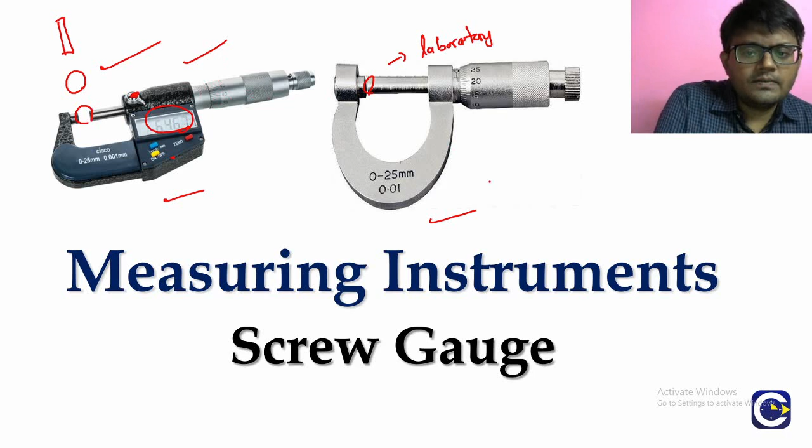And the moment you hold it and lock this nut, what you see here is that a reading will appear. So we don't need to do anything else - that is the benefit of the digital screw gauge. Some laboratories will have the digital screw gauge, which eases up the entire job, but conventionally we will talk about the normal laboratory screw gauge.

So when we want to understand the screw gauge, first let us know what is its purpose. Generally when we want to measure lengths or distances, we use the meter scale. The least count of the meter scale will be 0.1 centimeter or 1 millimeter, the smallest division on that meter scale.

But if we want to measure lengths with even more accuracy, like with vernier calipers, we discussed in that video that we can measure lengths accurately up to 0.01 centimeter. So the least count of most common vernier calipers is 0.01 centimeter. But if you want to take measurements with even more accuracy, then we'll use the screw gauge. Typically with a screw gauge we can measure up to 0.001 centimeter accuracy - so we'll have a higher accuracy than the vernier calipers.

But vernier calipers has its own advantages, because it has different positions where we can take the measurement. Vernier calipers can be used to find the depth of a vessel, but screw gauge cannot be used to do that. So the applications of the screw gauge will be limited, because there is only one position where we can hold the object, between these two rods.

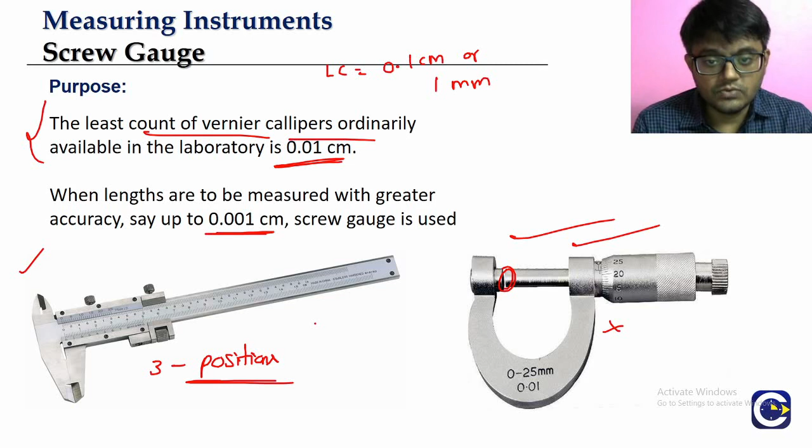We will try to study the screw gauge in this video, and basically what we'll try to understand is how the screw gauge is designed, what are its different parts. Then we'll see what are the things we need to know before we take the measurement - we should know some things about the screw gauge's working. So we'll talk about the working of the screw gauge, then we'll talk about the measurement.

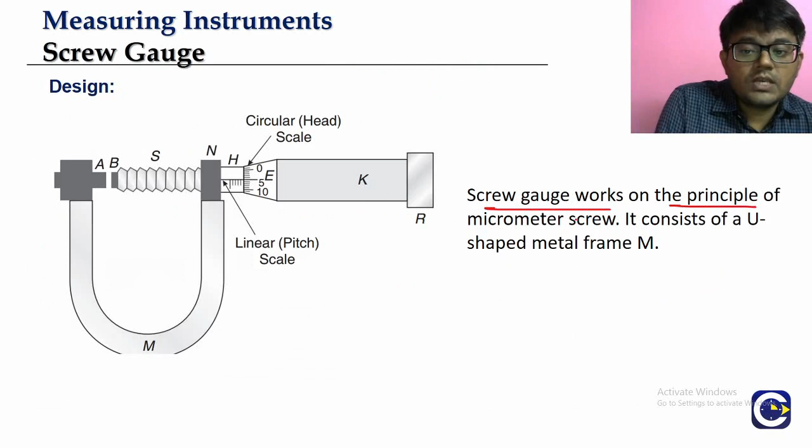So first we'll start with the design of the screw gauge. Now if you look at the screw gauge, it works on the principle of the micrometer screw. What is a micrometer screw? We'll talk about it. Basically, what is a screw? A screw is something that we will be able to rotate, and then it will have a linear movement.

So when you rotate a screw, what is going to happen? The screw will have a linear movement. So it is going to work on that principle. When you rotate, the screw would be having a linear movement, and that is the basic principle of the screw gauge.

Why the word micrometer has come, we will be able to know once we complete the discussion. Okay, so what will be the main parts of the screw gauge?

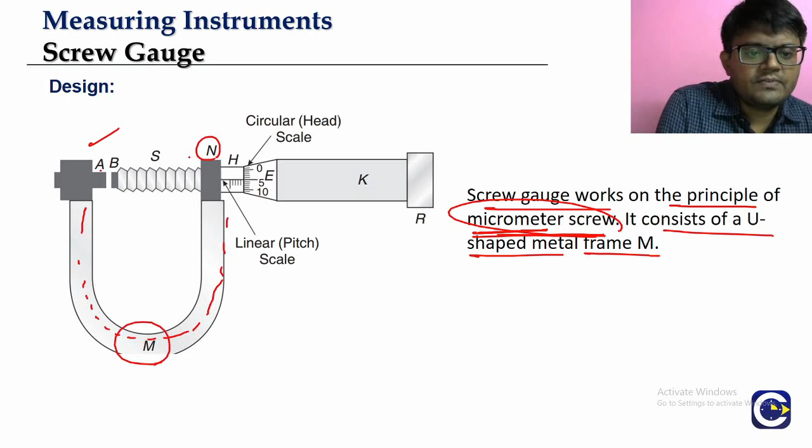We will have a U-shaped metal frame. You can see here, this is a U-shaped metal frame, which we are denoting with M. You can see on one end of the metal frame we have the fixed end A, other side we have the fixed end N. So what are the two things we have? One side of the U-shaped frame is A, other side is N.

Now at one end of it we'll have a small metal piece A. What do we call it as? We'll be calling it as the stud. So this metal piece A will be called as stud. It can be also called as the anvil. But here we don't need to discuss about those names and all that, just having some idea will be sufficient. And we see it will have a plane surface, you can see here there is a plane face it is having.

The other end N of the U-shaped metal frame M carries a cylindrical hub H. The other end N is carrying a cylindrical hub. The hub H is cylindrical, and on this hub you will see that there will be markings.

So there will be graduations or markings. This hub H is graduated in terms of millimeter or half the millimeter. So this is basically the smallest division or least count of this particular scale. This is actually a scale, you know what we call it as? We'll be calling it as the linear scale or the pitch scale. So the cylindrical hub has markings, and that itself is representing a scale, called the linear scale or the pitch scale.

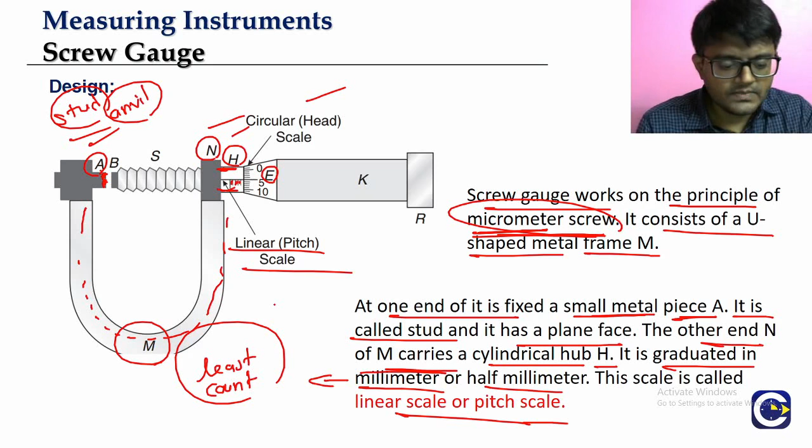So let us see how it is going to happen. Now the design: a nut is threaded through the hub and the frame N. So the hub and frame N, right? You will have a nut that will be actually threaded through the frame N and the cylindrical hub.

Okay, so these two will be fixed, we have to keep that in mind. The frame N or that cylindrical hub, they will not be moving, these two will be fixed. But through them there will be a nut that will be threaded, and this nut will be able to move the screw S. The nut that is connected to the screw S on one side, other side it will be connected to the right side part - we'll talk about that later - but when we move the nut, obviously the screw will be moving.

So when the screw is moving, what is going to happen? The plane face of the screw B will also start moving.

You can see the plane face of the screw B is kept opposite to the plane face of the frame A. These two, the screw can either move this way or that way. When it is coming and completely the plane faces of A and B are touching...

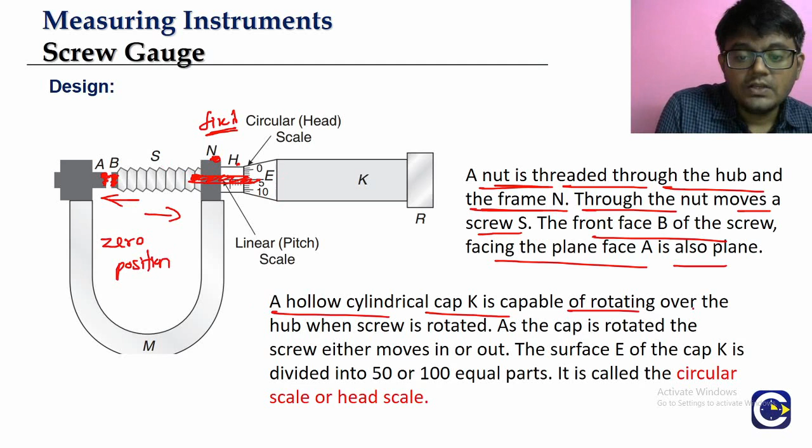We will see what is there on the right side part. You will have a hollow cylindrical cap K, which is capable of rotating over the hub.

So K is a hollow cylindrical cap, like a cap. This will be capable of rotating over the hub. As I said, the hub is fixed.

The hub will not move. You will have the hub like this, and this cap will be able to rotate over the hub. I'll show you the visualization so we can understand that better.

When the cap is rotated, the nut is connected to that, so the nut will be rotated, and the screw also will be rotated. As we rotate the cap, the screw will either have inward movement or outward movement.

This means the screw will have a linear movement. As the screw is rotated, it will also have a linear movement, either moving inwards or outwards.

And the surface E of the cap K, there will be this curved surface. What do we call it? We call it E. This curved surface will be divided into markings.

Usually it will be divided into markings of 50 or 100.

And this scale that is formed on the part E will be called the circular scale or the head scale. What do we call this part? The circular scale or the head scale.

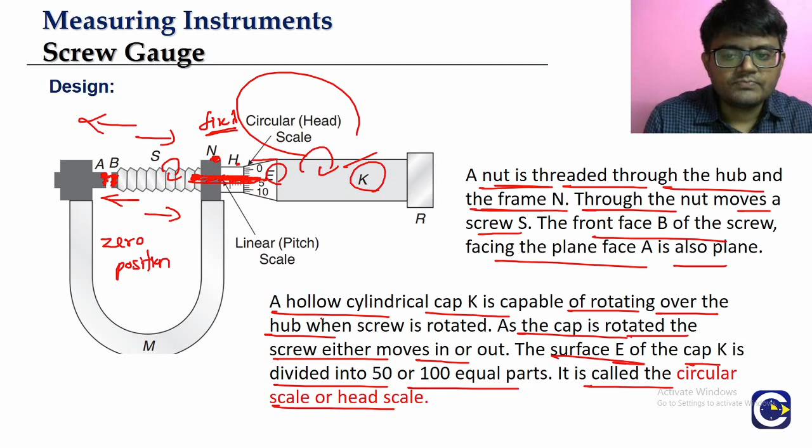So this is the cap K. This is A, and B you can see, and this is the screw.

This is the hub H. H is not moving, you can see. This is N, also not moving. What is moving? When you rotate the cap, what is happening?

This is the part E, where you have the circular scale. When you rotate the cap, what is happening?

The nut, through the nut, the screw is able to rotate. The screw will either move inwards or outwards, and this is typically the way we will bring it.

Once it is touching, we'll fix this bolt, and we can take the measurement. We'll talk about how we take the measurement, but this is how the screw gauge is basically designed.

Now what we will do is try to understand what are the things we need to know about the screw gauge before we go and take the measurements. But here one thing...

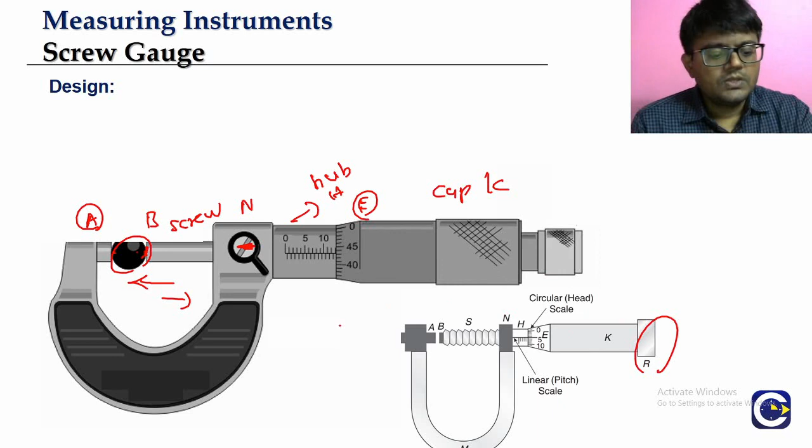Through the working, we will be able to understand those important things that we need to know before we go and see how we take the measurements.

So what happens, as we said, when the screw is rotated, in addition to the circular motion, the screw is also having linear motion. You can see the screw is either linearly moving inwards or outwards. The screw head, B here, is either moving forward or backward along the axis of the screw.

And when we complete one full rotation of the screw, the cap and the circular scale also complete one full rotation. So when we complete one complete rotation of the cap, the circular scale also will have one complete rotation, and the screw also will have one complete rotation.

Then whatever the linear distance moved by the screw during one complete rotation, that is what we call the pitch. So what is the pitch of the screw?

It is the linear distance moved by the screw when it has one complete rotation. How do we measure that value? For that we cannot have one more scale here to measure it. We are going to get it from the pitch scale markings.

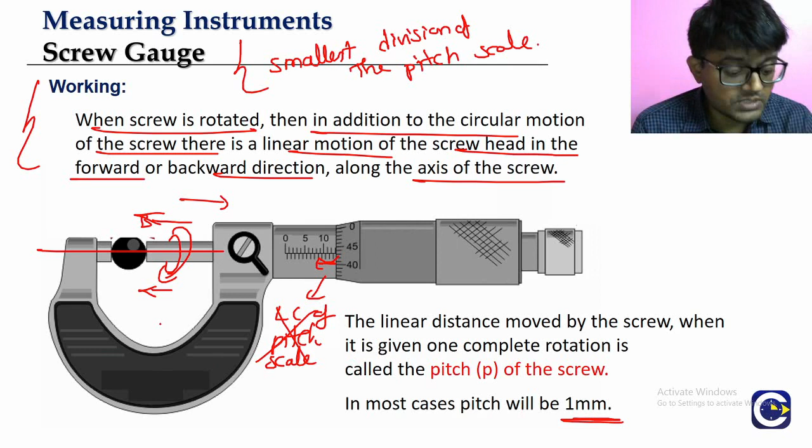Now using the pitch, we are going to talk about the most important thing for measurements, whether it is the vernier calipers or the screw gauge: the least count of the devices. The least count will be depending upon the pitch.

So look at this. If we have the circular scale, E, rotated through one circular scale division, using this reference line, just think about rotating it by getting just one division. So the circular scale is rotated through just one circular scale division.

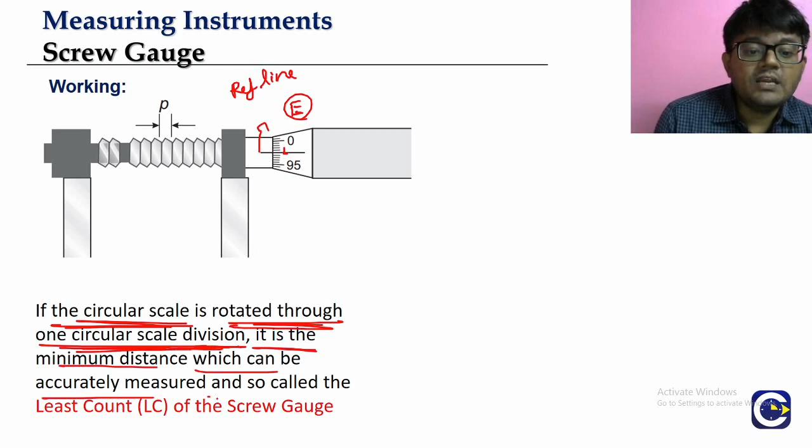Then that is basically the minimum distance which can be accurately measured by using the screw gauge. What is the minimum distance that can be measured accurately by using the screw gauge? Think about it: you just rotate that circular scale by one division. The circular scale will typically have either 50 divisions or 100 divisions.

So usually the circular scale will have either 50 divisions or 100 divisions. Just think about moving that circular scale by one division, and that value is basically the smallest length which we can measure with accuracy by using the screw gauge. So this is what we call the least count of the screw gauge.

How are we going to get it? Remember, if we rotate the circular scale by one full rotation, for example, we will take the circular scale having 100 divisions.

Imagine we take the circular scale having 100 divisions. If one full rotation means we are covering 100 divisions, what is the distance covered on the linear scale or pitch scale? It is the pitch value, which we said will usually equal 1 millimeter. So for 100 divisions of the circular scale, the distance moved is the pitch.

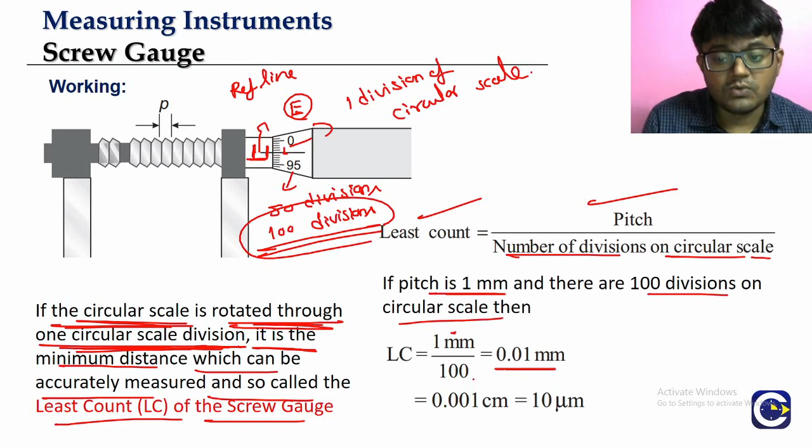Now with the example we are talking about, let us say the pitch is 1 millimeter and there are 100 divisions on the circular scale. Then what will be the least count? 1 millimeter is the pitch, divided by 100, that will be equal to 0.01 mm or 0.001 centimeter.

Remember in the initial discussion we said up to what accuracy we can get the lengths by using screw gauge. We said 0.001 centimeter, you can see here. And if you try to express it in terms of micrometer, centimeter means 10 power minus 2 meter. Totally this is 10 power minus 5 meter, or we can say 10 micrometer.

Mu is the symbol for micro. So the least count of the screw gauge is in the range of micrometer. That is the reason why we call it the micrometer screw. Remember we said the screw gauge works on the principle of the micrometer screw. Why are we bringing in the word micrometer? Because the least count that we can get from the screw gauge will be in the range of micrometers.

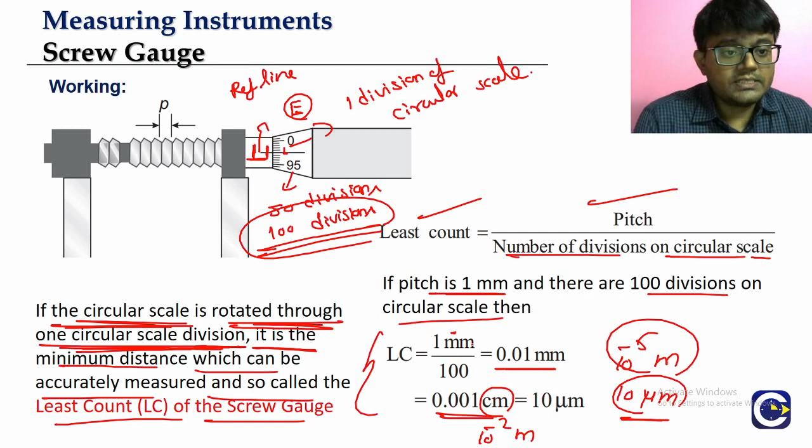Okay, so we understood the concept of pitch and the least count. Now we will look at the measurement position, because in screw gauge we don't have multiple positions. Like you can see this person in a laboratory taking some readings. Let us not bother about those readings, let us only focus on the measurement position. You can see where he is keeping it, this is the flat surface A and this is the flat surface B. He is basically keeping the object, this spherical object, between the two flat surfaces, and here the nut is fixed.

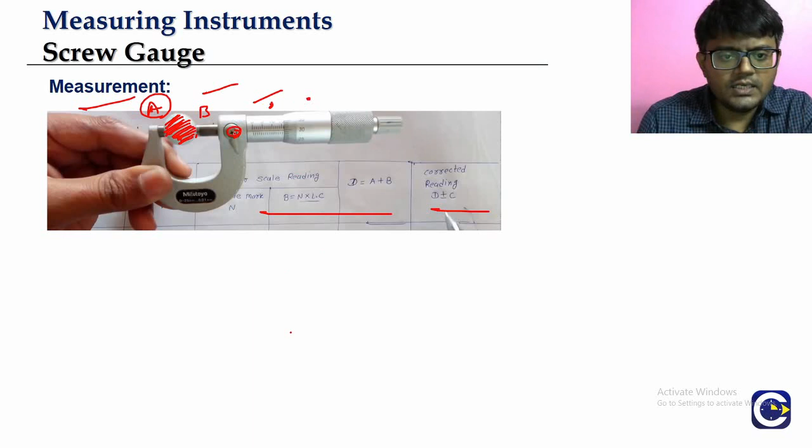Once you make sure that surface A and surface B are touching the sphere, you are basically fixing the nut. Now the position is ready to take the measurements. We will be shifting our focus onto the pitch scale and the circular scale, because once you fix it, we will just have to look at the main scale, or not, we don't call it a main scale, we call it the pitch scale or the linear scale.

And the other scale is the circular scale or the head scale. What is the other one? Circular scale or the head scale.

So we have to look at what is the reading on the linear scale. Linear scale can also be called the pitch scale. I am emphasizing on both these words because sometimes in examination questions they might use the word circular scale or the word head scale. And some people think head scale means maybe it is like a main scale, so they try to confuse this with the linear scale.

We should not confuse, we have to be clear. That main scale word will usually not come in. Main scale word we will not use. What are we going to use?

We will use the linear scale or the pitch scale, that is the hub, cylindrical hub. Then we have the circular scale or the head scale. These names we have to be very much comfortable with.

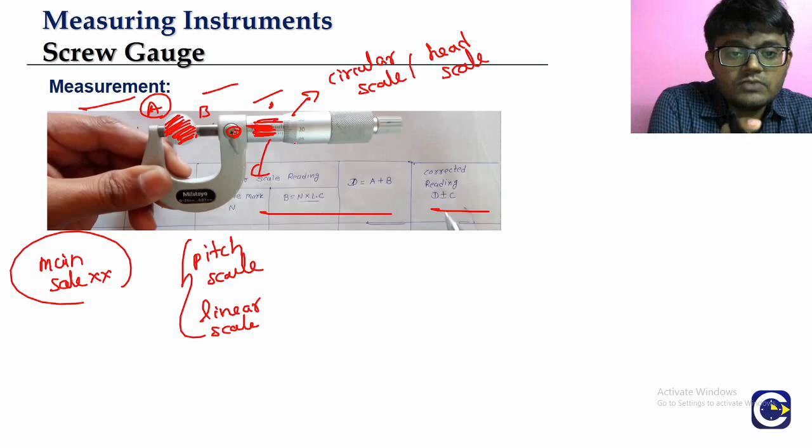Now this is the position which we have to hold that object before we go for the measurements. Now we'll go for the measurement. How are we going to get the measurement?

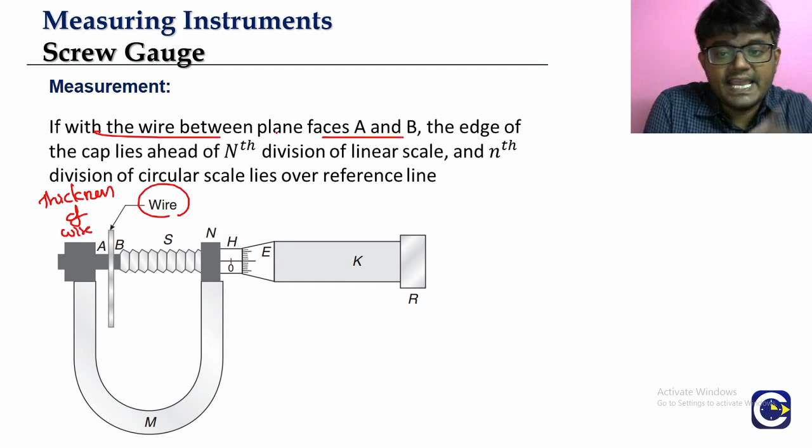Look at this: the edge of the cap lies ahead of the nth division of the linear scale. This is the cap, and this is the edge of the cap. The edge of the cap is lying ahead of the nth division of linear scale. Meaning, the linear scale has divisions. Let us say there is division 10. After that, the edge of the cap is starting. We have to focus on this 10 - this is our capital N.

So I can also say it another way: what is the linear scale marking which you can clearly see on the left side of the edge? The edge is there, right? On the left side of the edge, you will have the marking of that linear scale. That is what will be the reading that is coming from the linear scale. Generally we will represent this by capital N.

And then the small nth division of the circular scale lies over the reference line. As I said, there is a reference line - this is the reference line. Circular scale has the markings. We'll have to look at what is the circular scale marking which is either in line with the reference line, exactly matching, or a little bit ahead. Maybe it is the 44th division on the circular scale, imagine, that is aligning with the reference line. Then we will take that small n value as 44.

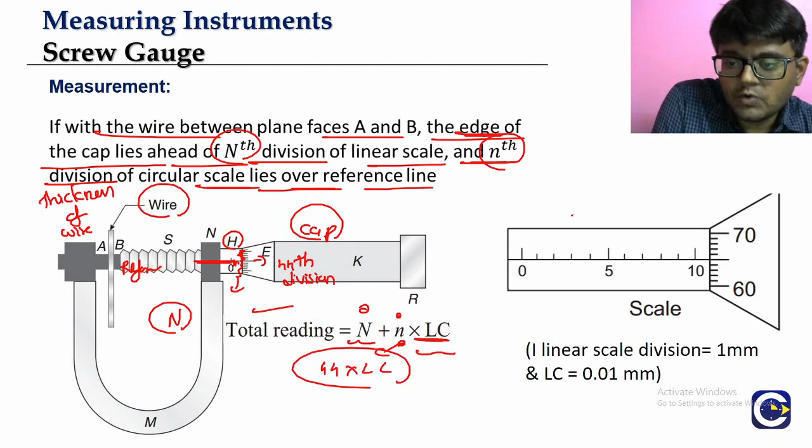So just take this - this is our linear scale. And here they are giving us: one linear scale division is equal to 1 millimeter. What is one linear scale division? 1 millimeter. Now remember what we said - we have to check the edge. This is the edge, this is the edge.

Edge is lying ahead of which division? In the linear scale, we have the 10th division here. Clearly you can see the 10th division, but the 11th division you are not able to see. Look at it carefully. On the left side of that edge, what can you see? The 10th division you can see, but are you able to see the 11th division? No. That means we have to take the 10th division on the linear scale as the linear scale division.

What is the value of each linear scale division? 1 millimeter. So what is the linear scale reading? It will be 10 into 1 millimeter, because the value of each division on the linear scale is 1 millimeter. So it is 10 millimeters. That is the reading from the linear scale.

Now let us talk about the reading from the circular scale. The nth division of the circular scale which is lying over the reference - it is either perfectly in line with the reference or a little bit ahead of it. Look at this: 60, 61, 62, 63, then 65. The 65th division of the circular scale is in line with the reference, the 65th marking on the circular scale is in line with the reference.

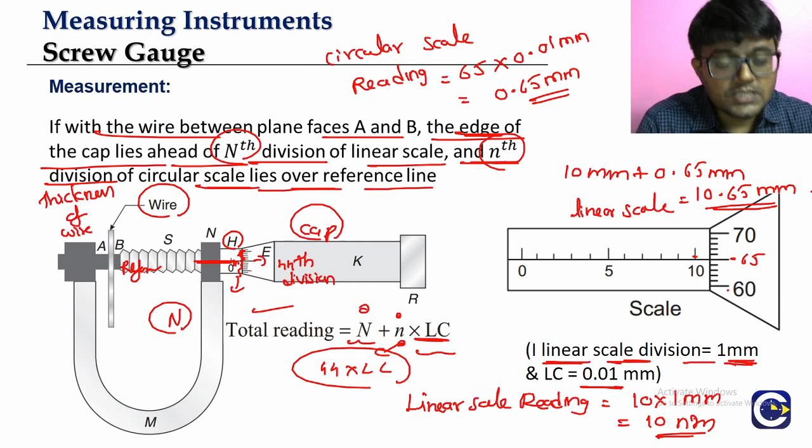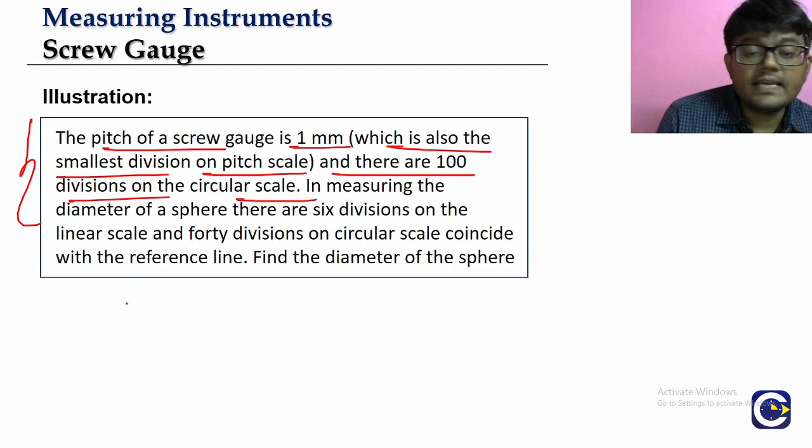Remember, what is the least count formula? Pitch divided by the number of divisions on the circular scale, correct? Pitch is 1 mm divided by the number of divisions on circular scale, which is 100. What is it going to be? 0.01 mm. So we'll keep it as 0.01 mm. This is our least count.

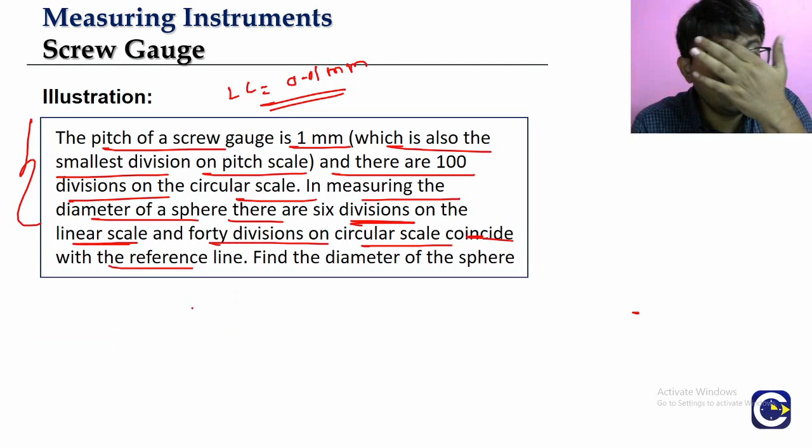In measuring the diameter of a sphere, I showed you the position which we will use to take the measurements. We can use a screw gauge to find what is the diameter of an object like a sphere. In measuring the diameter of a sphere, there are 6 divisions on the linear scale - what is the number of divisions on the linear scale? They are actually giving us the reading on the linear scale: 6 divisions, and 40 divisions on the circular scale coinciding with the reference line. So what is the reading on the linear scale or pitch scale? How many divisions are there? 6 divisions. 6 into what is the reading on the linear scale or pitch scale? The smallest division is what?

1 millimeter, right? Means what? 6 into 1 millimeter, what is it? So how much is it going to be? It will be 6 millimeters. That is the reading coming from the linear scale or the pitch scale.

Linear scale can be also called as the pitch scale. Then what about the reading on the circular scale? How many divisions are they saying? 40 divisions on the circular scale coincide with the reference line. Means what? Small n into least count, that is the reading from the circular scale. Here small n will be 40. 40 into what is the least count? 0.01 mm. 40 into 0.01 means it will be 0.4.

How much is it? 0.4 mm.

So now we have the reading from the linear scale, and we have the reading from the circular scale. What is the total reading? It will be 6 mm, which is the reading from the linear scale or the pitch scale, plus 0.4 mm. What is it? 6.4 mm. So this is how we will be able to get the reading from the screw gauge.

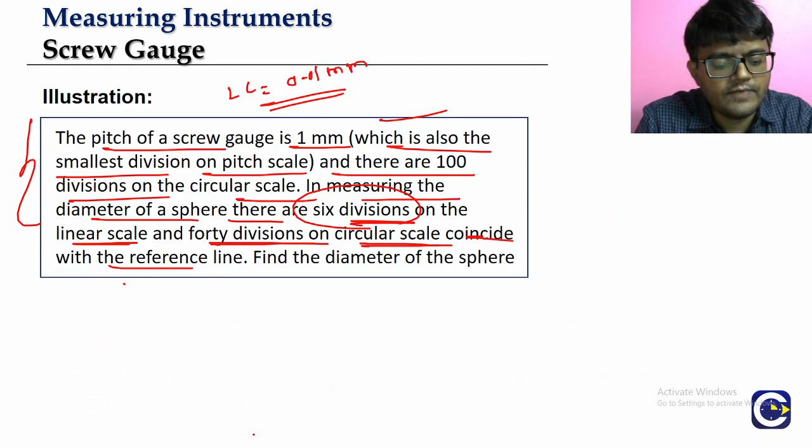So first we are getting the least count, then we are just going for the measurement calculation. So measurement calculation will be coming from where? It will be coming from the linear scale reading and the circular scale reading. We can see here least count is what? The pitch is 1 millimeter. 1 millimeter divided by 100, what is it? 0.01 millimeter.

Then what is the linear scale reading? It is 6 divisions, right? Which means what? 6 into 1 millimeter, because the smallest division is the pitch, which is equal to 1 mm. So 6 divisions are there on the linear scale. Means the reading will be 6 into 1 millimeter, which is 6 millimeter.

Okay, now look at the circular scale reading. Which division is coinciding with the reference line? 40th division. So 40 into least count, that is 0.4 mm. So what is the total reading? Which is the linear scale reading 6 plus the circular scale reading 0.4, which will be totally 6.4 mm.

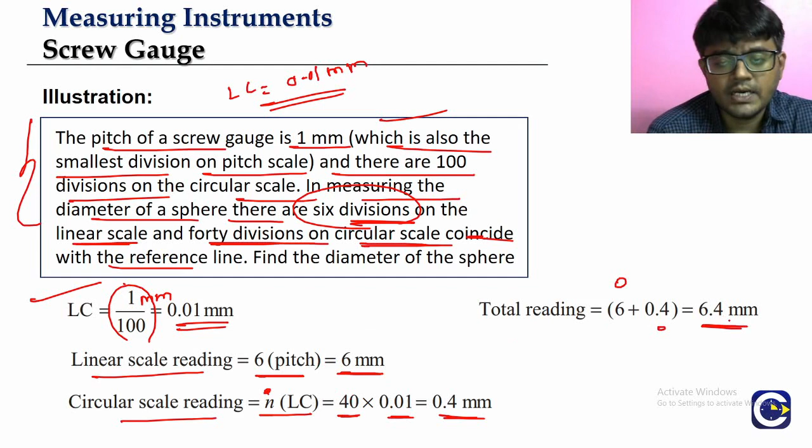So this is how we'll have questions mostly on the screw gauge when it is about finding the measurement. Either we'll have questions asked on getting the least count value, or we'll have questions.

Now, like we have seen in the case of vernier calipers, we could have some zero errors in the case of the screw gauge also. So what is this zero error? For these measuring instruments, we'll talk about the zero position. So what is zero position? Already we have mentioned about it. You have these flat faces A and B which are just touching each other.

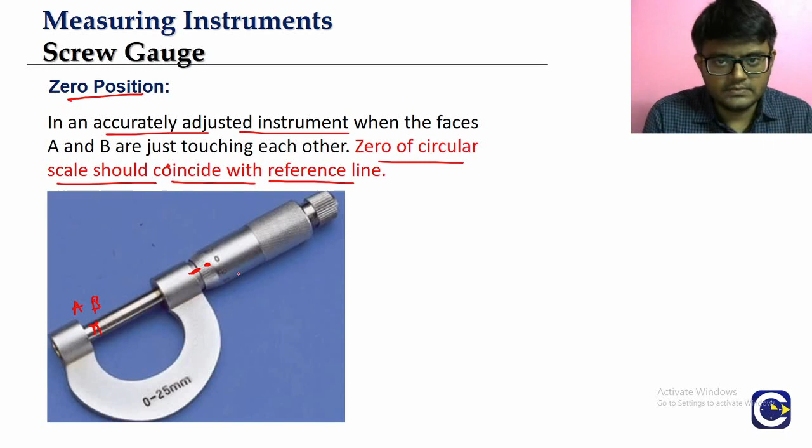So in this case, what do we say? We will say there is no zero error. Now when will the zero error come? If the zero mark of the circular scale does not coincide with the reference line. You can see here, so this is the reference line. See, division 5 is coinciding. Zero of the circular scale is not coinciding.

See here, this is the reference line. Which division is coinciding? Division 95 is coinciding. Means in this case, the zero of that circular scale is ahead of the reference. Here zero is ahead - the zero of the circular scale is ahead. Here the zero of the circular scale is behind. Accordingly, we are going to talk about two types of zero errors. But here we will just understand the concept of the zero error. So what is it?

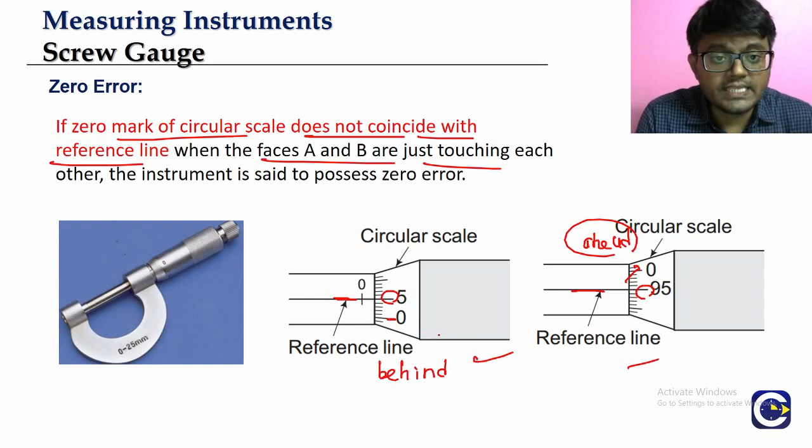When we bring these faces A and B just touching each other, you see that the circular scale's zero is not coinciding with the reference line. We can have two scenarios here, and both of them indicate a zero error. Now we have to understand the difference between them.

One type of zero error we call negative zero error. What is this negative zero error? If you see, the zero of the circular scale is advancing ahead of the reference line.

The marking 95 is coinciding with the reference line. When we say marking 95, that side means we take positive, and this side means negative. So if you see 5, 10, 15, the other side is positive, but you are coming in the reverse direction, so we take it as negative. So how many divisions is it behind? 95 means we are behind 5 divisions.

So when the zero of the circular scale is ahead, the reading on the circular scale is negative, because it is in the reverse direction. Here, the 95th division of the circular scale is coinciding with the reference line. That means we have a 5 division mark in the opposite direction. So there are 5 divisions between the zero mark and the reference, but in the opposite direction. That is why we take it as negative reading.

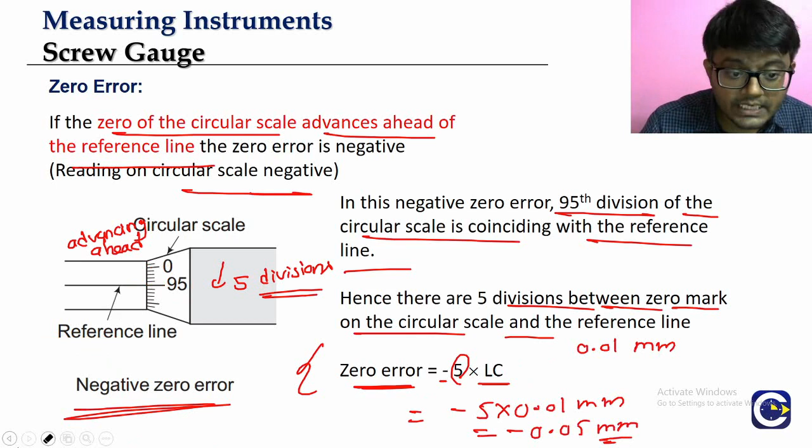One more thing to keep in mind about the zero error in the negative sense: when there is a negative zero error, we will not be able to see the 0 marking on the pitch scale. This is because the circular scale is shifted slightly to one side, so we cannot see the 0 of the pitch scale or linear scale.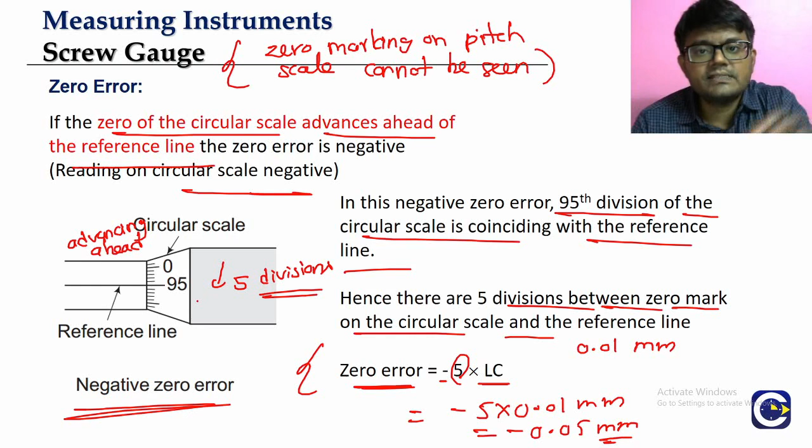So whenever they say that the 0 of the pitch scale is covered or not visible, that is a hint indicating negative zero error. Now let us see the other side: positive zero error. Here, the 0 of the circular scale is behind the reference line, as you can see.

But you see what marking on the circular scale is coinciding with the reference line.

Marking 5. What is the reading on the circular scale? 5, right? So the reading on the circular scale will be positive. Negative error means circular scale reading will be negative. Positive means circular scale reading will be positive. That is how simple we can remember.

Now see, in this case what is happening? The fifth division of the circular scale is coinciding with the reference line. But in the previous case and this case, what is the difference? There it was the fifth division in the reverse direction, that is why we took it as negative. Okay, so here the fifth division is in the forward direction, right?

So the 5 divisions are marked between the 0 and the reference line. So what is the 0 error we are going to take? It will be plus 5 into the least count. Same way, if the least count is, say for example 0.01 mm, then what will be the total 0 error? It will be plus 0.05 mm. Okay, so this is how we are going to get the 0 error.

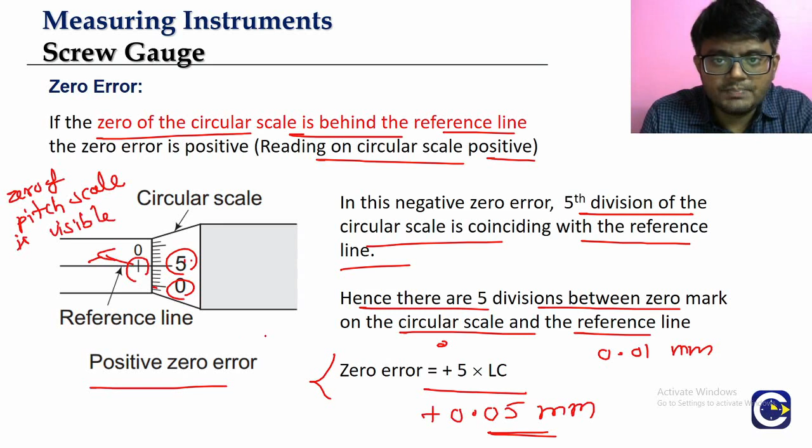And we can see one thing here: in case of positive 0 error, the 0 of the pitch scale is visible. In case of negative 0 error, the 0 of the pitch scale will not be visible. That is another difference between the negative 0 error and the positive 0 error.

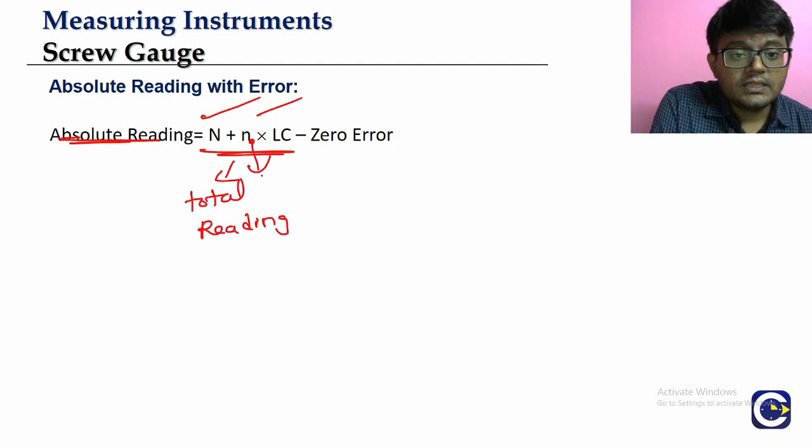Now what about the absolute reading or actual reading we are going to count? The absolute reading will be the total reading. This is the total reading, right? What is the total reading value? The pitch scale reading plus circular scale reading. Circular scale reading is the number of divisions on the circular scale which is coinciding with the reference line, into the least count.

Okay, so total reading, whatever we get, from that we have to subtract the 0 error. Always the 0 error will be subtracted. From whichever measurement we are having, we have to subtract the 0 error to get the absolute reading.

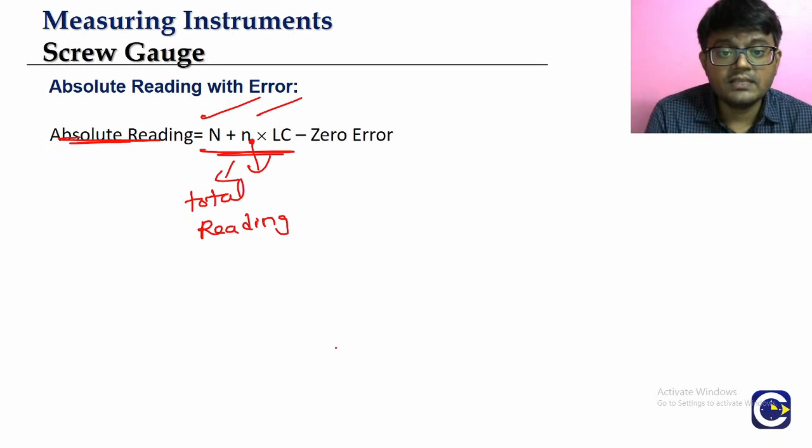This is something that we have seen even in the case of the vernier calipers discussion also. Why I am trying to correlate between the vernier calipers and screw gauge is, other than the method of taking the measurement, other things more or less will remain the same. Other than the method of measurement, remaining things will be almost similar. Now there will be one more term sometimes we will keep hearing.

The term is zero correction. Okay, so it is nothing different. Zero correction is basically something which will be equal to the 0 error in terms of magnitude, but opposite in terms of the sign. Say for example, I'm talking about zero error. So we have seen both the examples, right?

Negative zero error means this is where I'm keeping minus 0.05 mm. Now what is the corresponding zero correction? It will be having the same magnitude as the zero error, but opposite sign, means it will be plus 0.05, like that. Okay, if the zero error is plus 0.05 mm, then what about the zero correction?

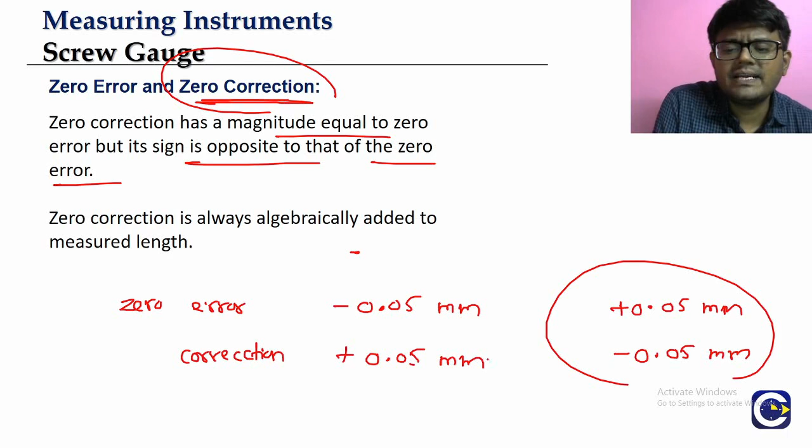I mean, how do we look at it? Just negative of the zero error, that's it. Now where do we use it in terms of the formula?

Look at this, what do we have? The absolute reading. What is the formula for the absolute reading? Absolute reading is equal to total reading minus zero error. But in place of this minus zero error, because what is the negative of zero error? Zero correction, right? We can also write it like this: total reading plus zero correction. How can we write it? Total reading plus zero correction, like that we can write.

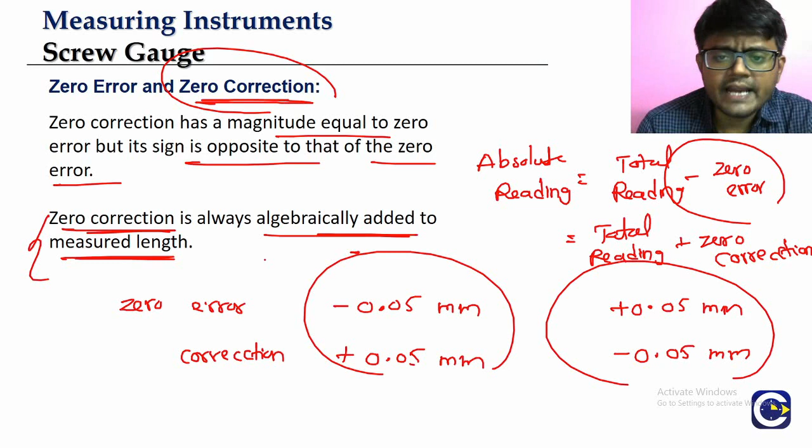Okay, so zero error is subtracted from the total reading. We have to subtract the zero error, but zero correction will be algebraically always added to the measured length. Measured length means total reading, right? So zero error means subtracted, zero correction means added, so that we will get the absolute value of the reading. Okay, so this is about how we understand the zero error in case of the screw gauge.

Now we'll look at a question. Look at this one: circular head of a screw gauge is divided into 200 divisions, and moves 1 millimeter ahead in one revolution.

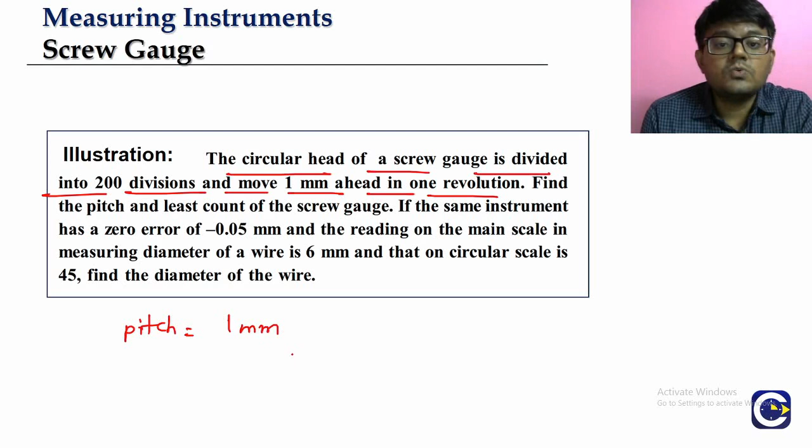Means it is moving 1 millimeter ahead. Look at this, guys. What is the pitch here? What is the distance moved in one full revolution? That is 1 millimeter. Okay, so we can find the least count.

What is the least count? Pitch divided by number of divisions on the circular scale. So 1 millimeter by 200. Okay, you know how much it is going to be? It will be 0.005 mm. Okay, so this is what is the least count.

Find the pitch and least count of the screw gauge. So we are able to get the pitch, we are able to find the least count also. Okay, if the same instrument has a zero error, so we'll just note it down.

What is the zero error given to us? Like that in most of the questions, they will themselves give the zero error. What is the zero error? Minus 0.05 mm. Is it a positive zero error or negative zero error? It is a negative zero error. How do we say? Because you look at the sign, it is negative.

And reading on the main scale in the measurement of diameter of wire is 6 mm. So I said generally we will not use the word main scale, but sometimes in questions like this, if they are using, then what is it that we need to understand? That they are referring to this as the pitch scale or the linear scale. So what is the reading on that?

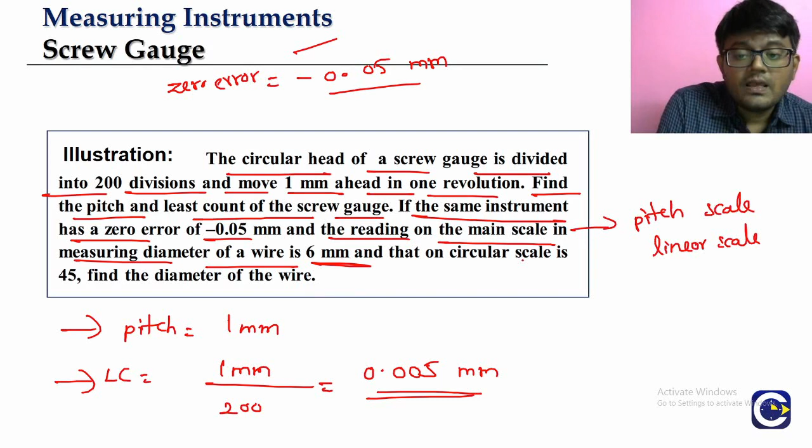It is 6 millimeter, and circular scale is 45. Means the 45th division of the circular scale is coinciding with the reference line. That is what they mean. Okay, so look at it.

What is the first? We'll get the total reading. They are asking us to find what is the diameter. First we'll have to get the total reading. Total reading means the linear scale reading, which is 6 mm, plus what is the division on the circular scale coinciding with the reference line? 45. So 45 into, remember, we have to multiply this with the least count.

0.005 mm. This is the total reading. Okay, so now we have to simplify this. If we simplify this, we will get the total reading. Okay, so we'll just do that simplification, and from the total reading already we got the pitch and least count. Those two parts of the question we already did. Now we are going to look at what is the diameter of the wire. We have to find what is the diameter of the wire.

Okay, so look at this. So we are looking at the total reading part. What is total reading part? 6 mm plus 45 into 0.005. So we can write as 45 into 5 by 1000. Just at the time of simplification, 5 5s are 25, 5 4s are 20. Okay, so totally which is 225 by 1000, means 0.225.

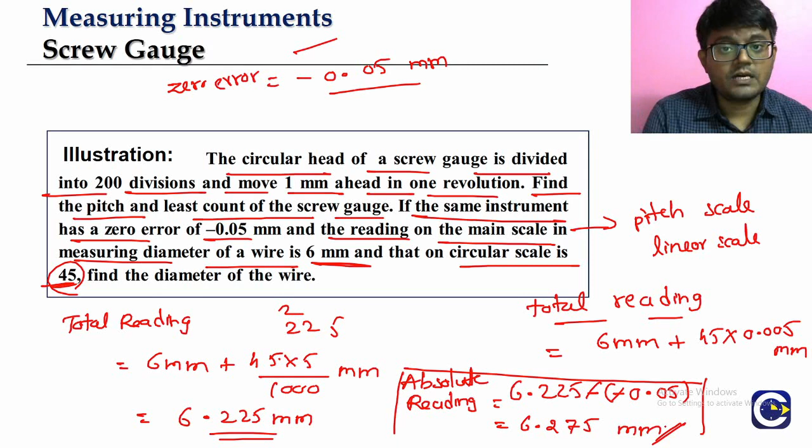Sometimes what happens is when we are using the screw gauge repeatedly, like even in your school laboratory, most of the screw gauges you are going to use would have been in use for quite some time, multiple years etc.

What is generally observed is when the sense of rotation of the screw is suddenly changed, the screw head will not move while you rotate the shell. Screw may not move forward or backward. So you're rotating one way, the screw keeps moving. Suddenly you change direction, but you will not see the screw start rotating in the opposite manner or moving in reverse immediately.

So this will affect the actual movement of the screw. Because you're rotating one way, the screw should go forward. The moment you change the direction of rotation, the screw should start coming backward, but due to wear and tear and some other reasons, this will not happen for screw gauges used for quite some time. As a result, the readings we get will not be the accurate ones.

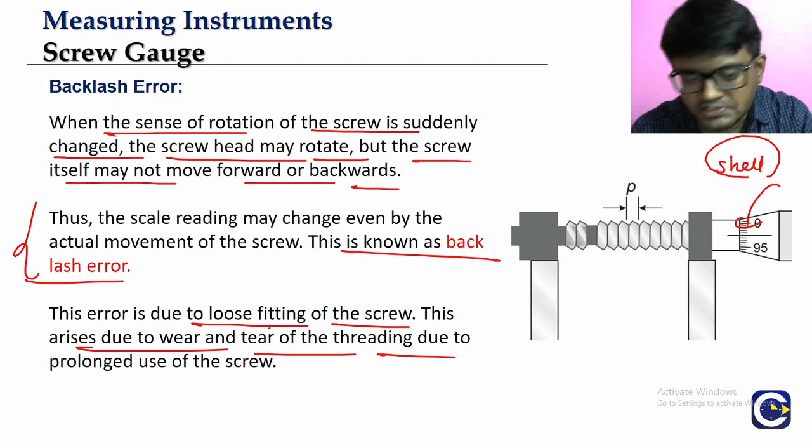So this is mainly due to loose fitting or wear and tear of the screw gauge. This type of error is called backlash error, and it's one of the very common errors in the case of the screw gauge. You can remember it as a theoretical point, so in case you get theoretical questions on screw gauge, you'll be able to answer straight away.

Now let's look at what we have covered in the screw gauge overall. First we talked about the design aspect, which is just to give us clarity, but from the competitive examination point of view, we need to look at the measurement part. So we have talked about the pitch.

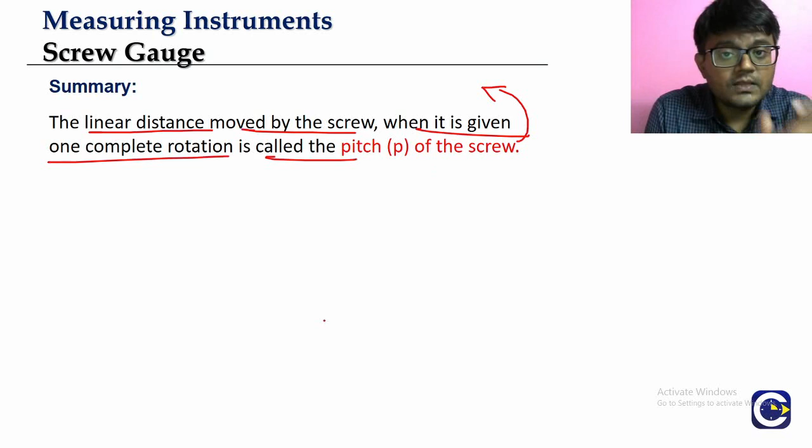What is the pitch? It is the linear distance moved by the screw when it is given one complete rotation. And remember, generally the pitch will be the smallest division on the pitch scale or the linear scale.

From the pitch we will be able to calculate the least count. What is the formula for least count? Least count will be equal to the pitch of the screw gauge divided by the number of divisions on the circular scale. Usually the number of divisions on circular scale will be either 50 or 100. From there we can find the least count.

Now where will least count be used? It will be used in taking the total reading from the screw gauge. The total reading will be the linear scale reading plus the circular scale reading. What is capital N representing linear scale reading? That is the division on the linear scale, which we can clearly see on the left side of the edge.

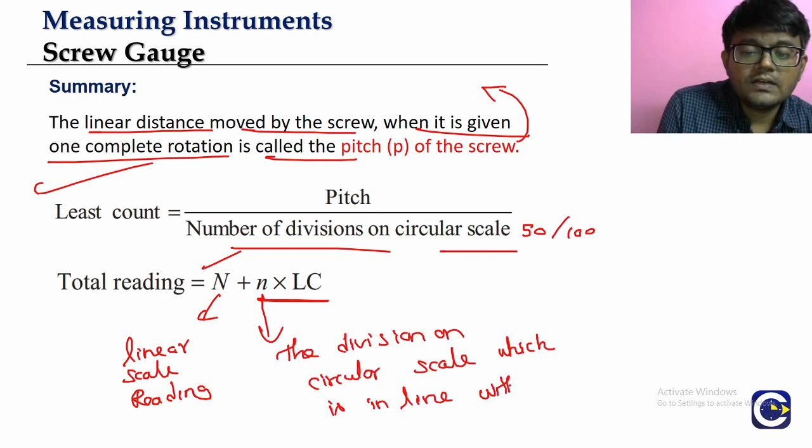Then we will have the circular scale reading. What is this small n? Small n is the division on circular scale - the division on the circular scale which is in line with the reference line.

When you keep the screw gauge in the measurement position, you keep a wire in between the two faces A and B. Remember we talked about the two faces A and B. A face is attached to the U-shaped metal frame, and B is attached to the screw. We will hold the object like this. When you keep the screw gauge in the measurement position, we will see that the...

...circular scale particular reading will be in line with the reference line. That is what is our small n. So small n we have to multiply with the least count, that is going to give us the circular scale reading. So linear scale reading plus circular scale reading is the total reading.

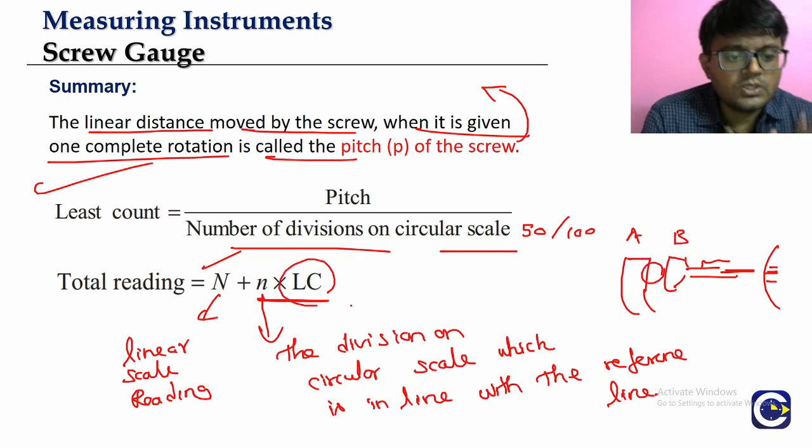Now sometimes when we are using the screw gauge, we can have errors. We call them zero error. One particular type of error is zero error. What is zero error? It is the error that we will have in the instrument. Even when we have the zero position, there is going to be some reading.

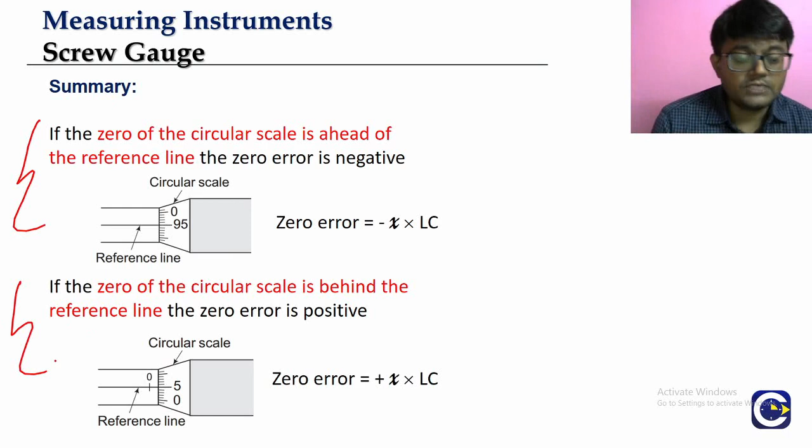Usually we can have either the negative zero error or the positive zero error. Negative zero error means the zero of the circular scale will be ahead of the reference. The reference is what we are focusing on. You see here, reference is matching with division 95. Here we will say we are counting in the opposite direction. That is the reason why negative.

From 0 we go that side means positive. From 0 we come this side means it will be negative. So that is the reason why here we will take 0 as negative. So what is the formula? It will be minus x. Here x represents the number of divisions gap we have between the 0 and the reference line.

Here what is it? 5 divisions gap is there, but it is in the opposite orientation. That is why we are taking it as negative. So minus x into least count, that is how we can get the negative zero error.

One more thing about the negative zero error: when we have a negative zero error, we will not be able to see the zero on the pitch scale or the linear scale, because the circular scale has actually moved a little bit in this direction. It is covering the zero.

Whereas in case of the positive zero error, you can see the zero. We get the positive zero error when the zero of the circular scale is behind the reference line. So the circular scale is indicating reading 5. It will not always be 5, it will keep changing.

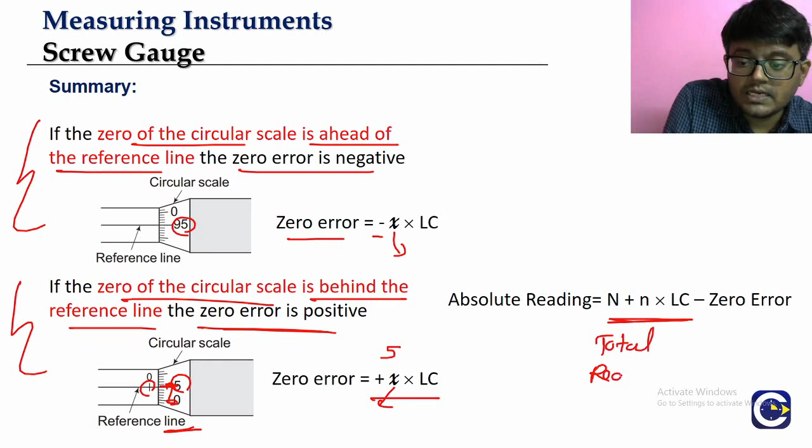Whenever we are getting the absolute reading, it will be equal to the total reading, which is the pitch scale reading and the circular scale reading total value. So from total reading, we have to subtract the zero error.

So this is what we need to understand in terms of the screw gauge, and we have seen some kind of questions that will be expected. Make sure that you are thorough in terms of the pitch, least count, and taking the total value of measurement, and measurement in case of zero errors. If you look at past year questions, whether JEE mains or NEET, we do get questions mostly on the measurement part of the screw gauge. We'll see one more video about the measuring instruments.